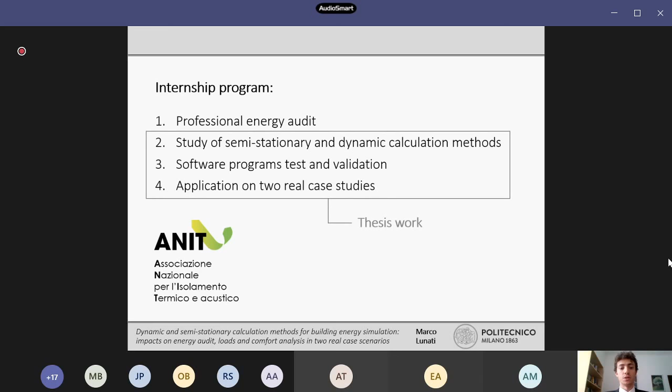This work was part of an internship program at ANIT. After following experts in an energy audit on a residential building, the focus moved to the study of semi-stationary and dynamic calculation methods, and I had the chance to test the ANIT software programs on two case studies. The first, a re-elaboration of the previous energy audit, gave me the chance to test and validate the model results against the benchmark of real building consumptions. The second was more a work of analysis of the dynamic potentialities on another existing building with tertiary use.

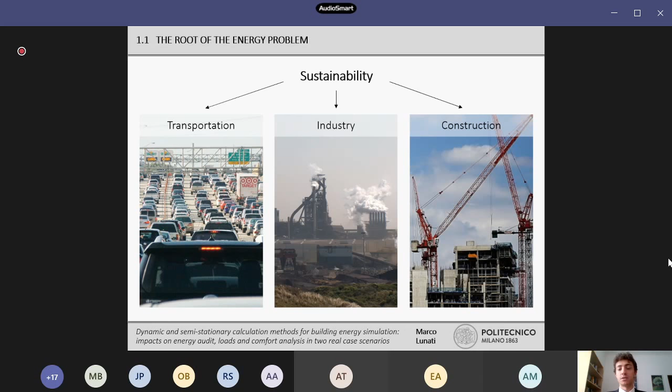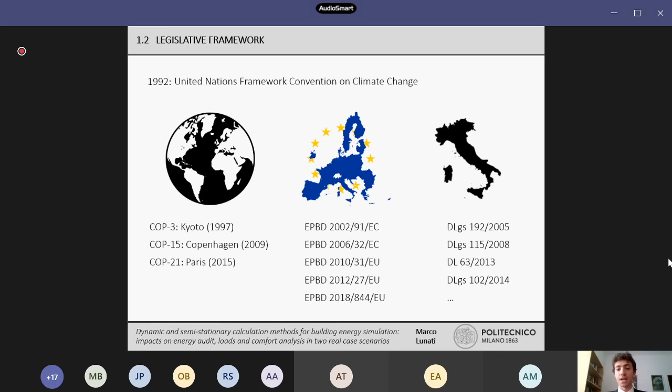As the climate change problem has been increasingly capturing our attention, interest in the energy field started to be accompanied by another concept: sustainability, especially in the construction industry, which absorbs up to 40% of the final global energy in Europe. The countries which signed the Framework Convention on Climate Change meet every year at the Conference of Parties. In particular, the Kyoto Protocol of COP3 inspired the European Union to produce the so-called Energy Performance of Buildings Directive, in order to improve the energy performance of the building sector in the community, implemented also at national level.

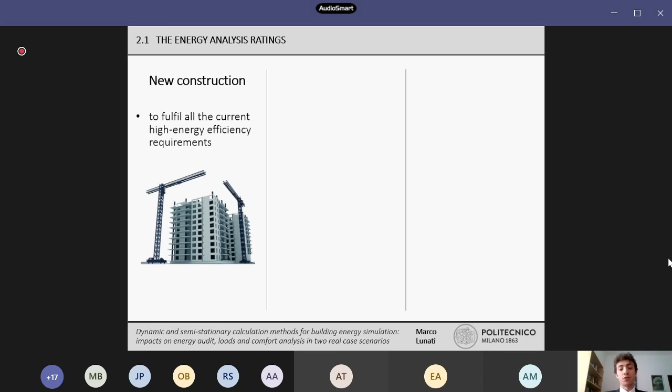The type of energy analysis is linked to the purpose to be carried out. A new building design is used to model and foresee the behavior of the building before construction. The energy performance certificate aims to rate the energy performance of existing buildings based on reference parameters, while the energy audit seeks to assess the actual energy behavior of existing buildings in order to improve their performance.

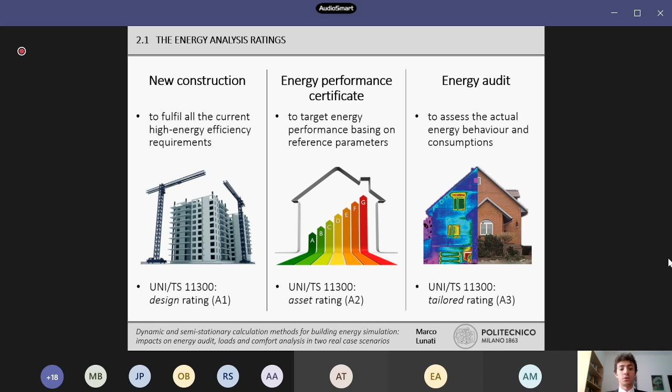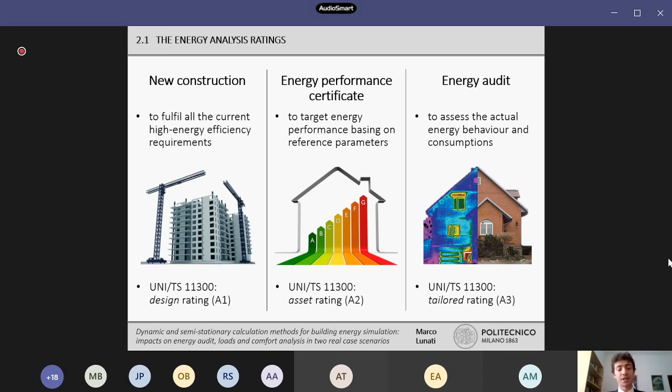These categories are reflected in the rating classification by the UNI/TS 11300, which identifies three types of ratings. Design and asset ratings are based on conventional climate and use, the former on planned buildings, the latter on existing ones, while the tailored rating is instead based on climate and use adapted to the actual building.

One of the main technical evolutions going side by side with the EPBD series has been the improved level of detail in building energy modeling. Starting from a seasonal evaluation, standards moved to a monthly semi-stationary method and then introduced the hourly dynamic one.

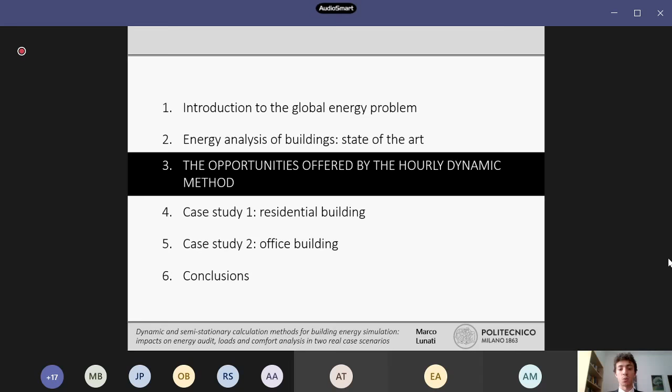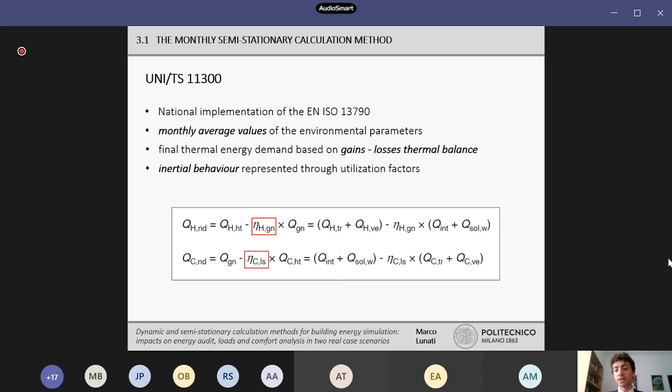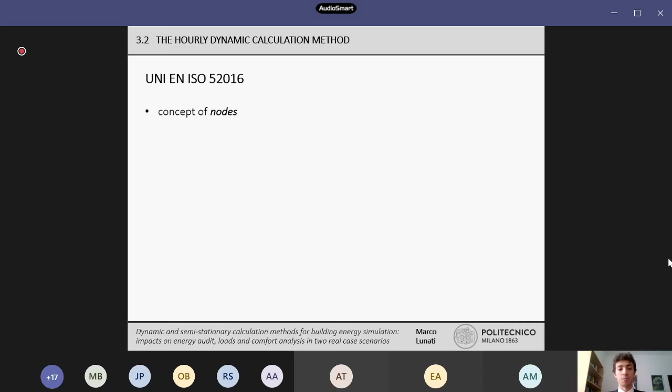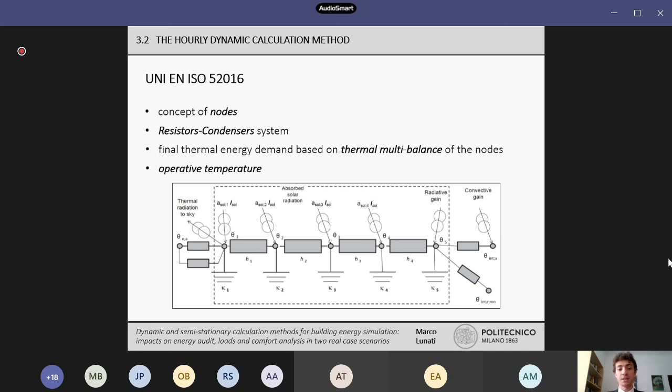They are specific points characterized by thermal inertia and temperature varying in time. At each node, an hourly energy balance is made according to the resistor-condenser system, and the heating and cooling needs are calculated based on the operative temperature that comes from an overall energy balance of the thermal zone.

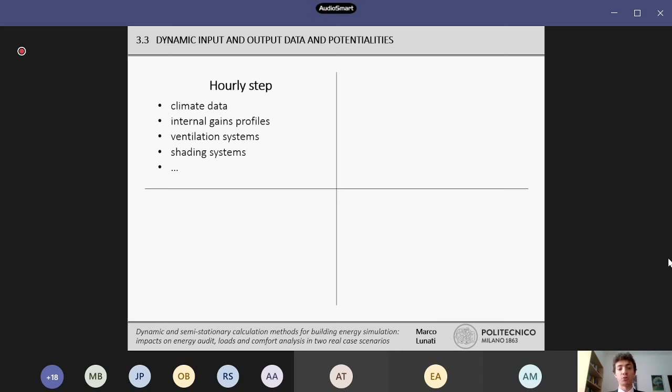The hourly step of the dynamic method is ideal to reproduce both climate data and the description of building users and systems. We can manage the plants in three ways: free running, not considering activation; constant or variable power; and with plant intermittence.

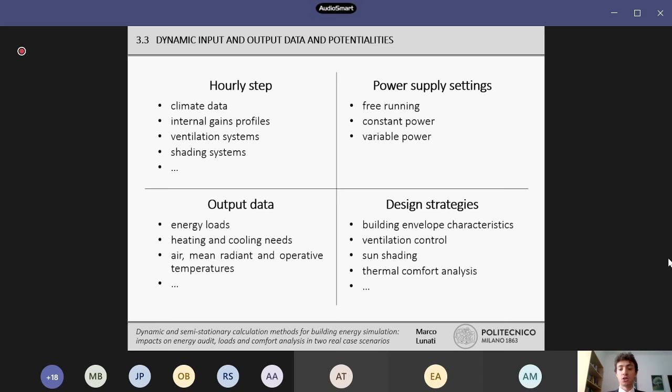It is crucial to develop a strong ability in reading and communicating the outputs, from energy loads and needs to the hourly trends of temperature, and also to take advantage of them at the design stage, especially looking at possible strategies to be adopted on the building.

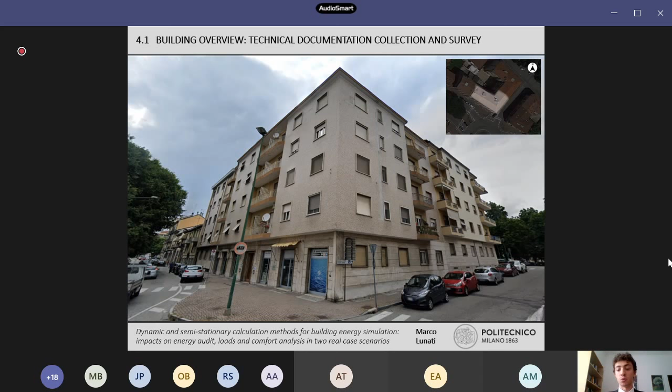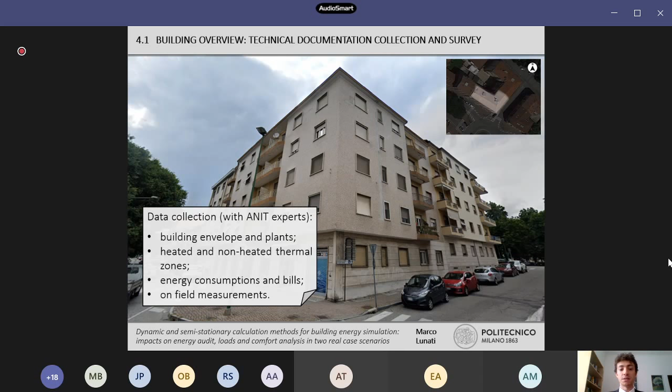The theoretical part was followed by two case studies. The first consists of an energy audit on an existing building in Casale Monferrato, Piemonte, to evaluate its winter energy performance. The data collection operation, made alongside ANIT experts, regarded the building envelope and plant characteristics, heated and non-heated thermal zone identification, the energy consumption and bills from the building manager, and on-field measurements.

A 3D model was made in Revit in order to return the quantitative amounts of opaque and transparent structures, and also the characteristics of the surroundings. Thermal zones are assigned one to each floor.

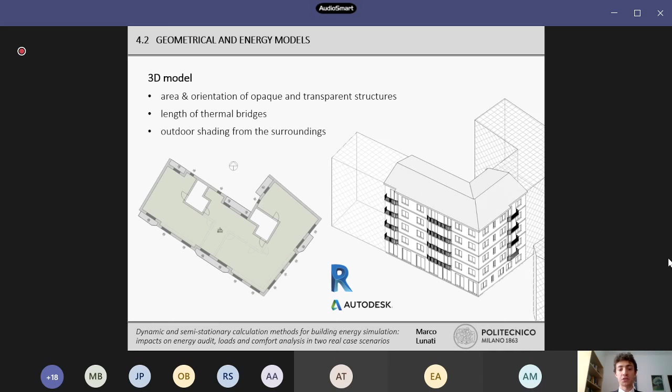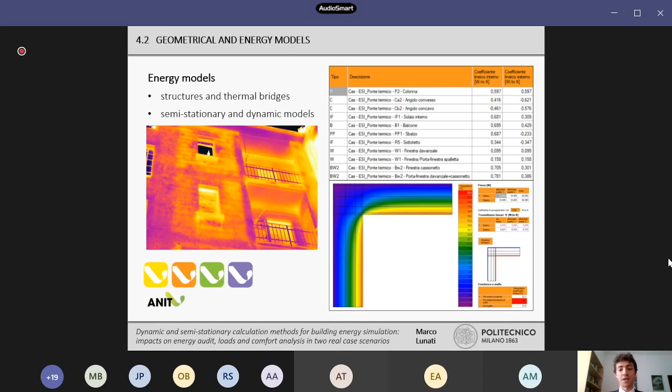The energy models were made in the ANIT software programs, in particular Leto for the semi-stationary analysis and Icaro for the dynamic one. The thermal properties of opaque structures were obtained through on-field measurements, and thermal bridges were calculated analytically. The model validation compares the energy consumption of the models with the real consumptions through the evaluation of the heating performance index parameter.

It is given by the ratio between consumptions and the degree days. Models are validated if the margin of error is within 5% with the real consumptions.

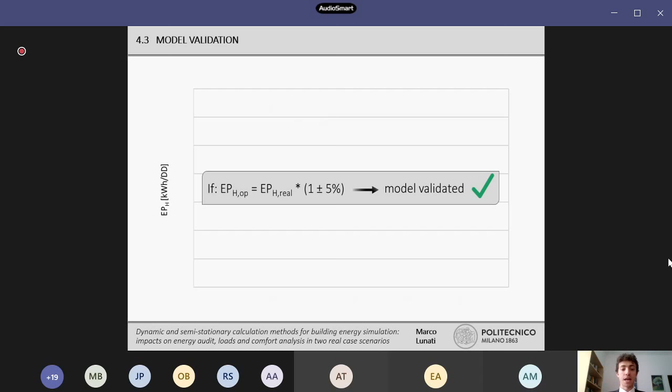As for the evaluation of the EPH real, I opted, instead of the conventional value of 20, for a range of temperatures between 20 and 18 degrees. This to take into account the fact that temperature can lower below the 20 degrees value due to the fact that plants do not work constantly, for example the night shutdown of the systems.

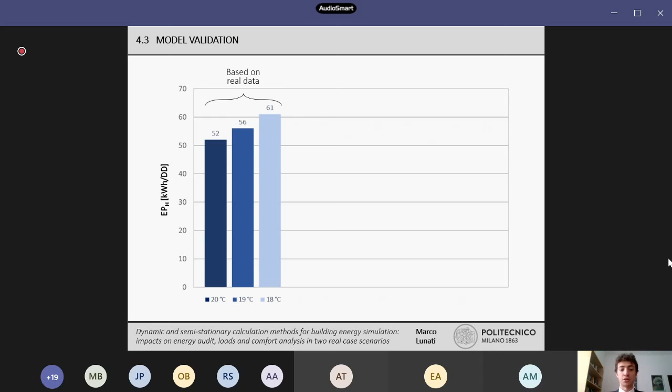So this range strongly influences the results, as we can see. Basing on the same energy consumptions, the lower the temperature assumed internal, the higher will be the EPH value.

What about the models? The semi-stationary one and its dynamic counterpart running at 20 degrees, D1, fit in this range. The following models tend to stay in this gap with a couple of exceptions.

The introduction of intermittence in D2 decreases the energy consumptions, and so in the following model, D3, it makes it reasonable to increase the set point temperature to 21 when the heating system is on.

The introduction of new and higher internal gains in D5 decreases again the energy consumptions, and this is then settled in the last two models working on the ventilation parameter.

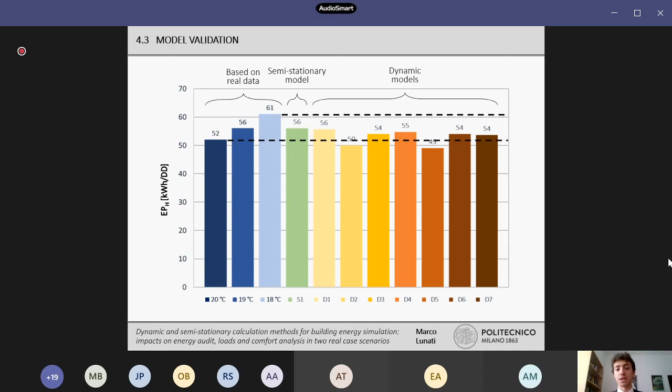So outputs are encouraging, as the EPH values tend to stay in the real range or out of it within an acceptable limit, and this supports also the initial conservative choice of a range instead of a single value for the internal set point temperature assumed.

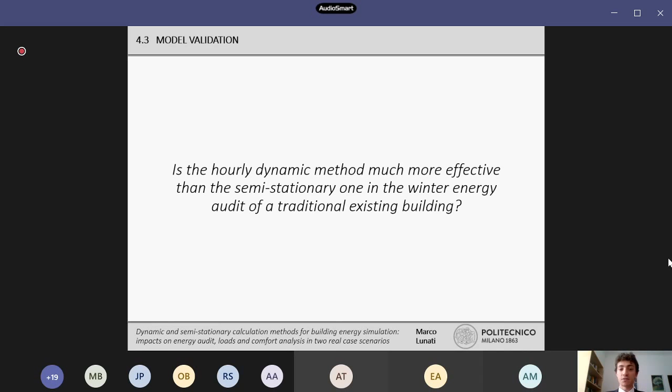So, is the hourly dynamic method more effective than the semi-stationary one in the winter energy audit of a traditional existing building? Well, no. In this case, the semi-stationary model shows an optimal reliability, and even if it is less detailed, that's enough to describe the energy behavior of the building in the winter season, at least.

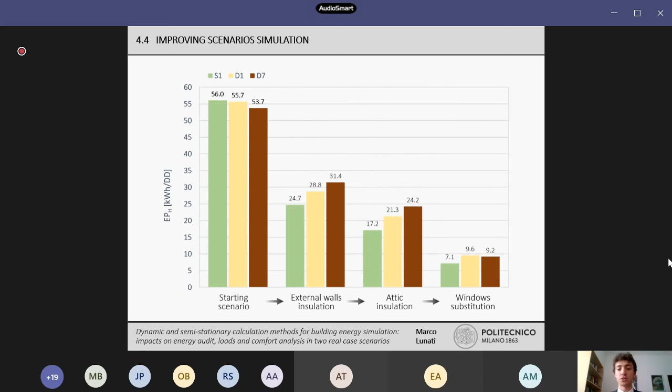The second part concerns the improving scenarios interventions, from the envelope insulation to the window substitution. Comparing S1, D1, and D7, we can see that the semi-stationary model decreases its consumption much faster than the dynamic ones. And with respect to D7, even D1 tends to decrease its consumption quite faster, at least in the first two scenarios. But any consideration has to be based on further analysis.

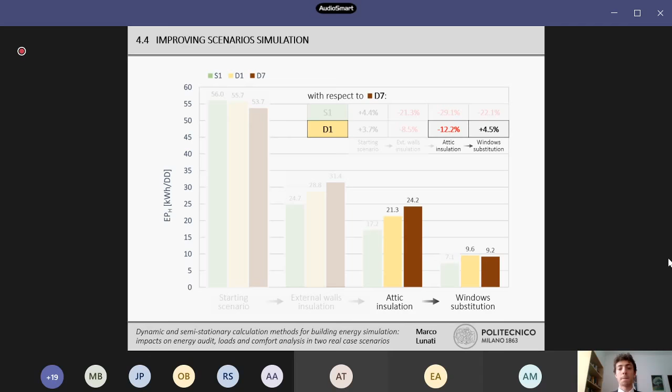So for example, we want to understand why D1 and D7 EPH values tend to get close in the last scenario, the window substitution. So checking the individual loads, we can see that the window substitution equally reduces solar gains and transmission losses, because new windows are the same in all the models.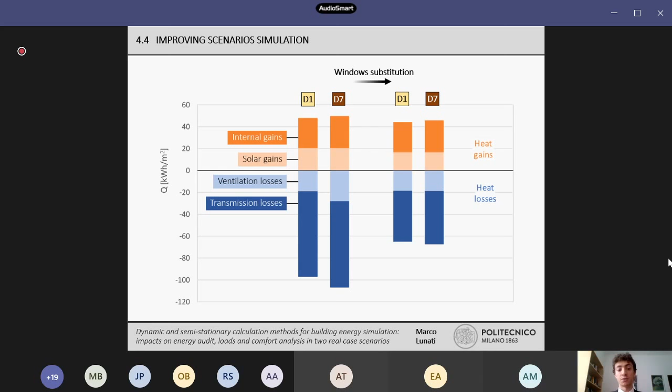So is there now any remarkable difference in the improving scenarios among the two methods? Yes, the semi-stationary model tends to lose some reliability, underestimating the heating needs, as the initially significant heat losses by transmission are reduced by the upgrading of the envelope performances.

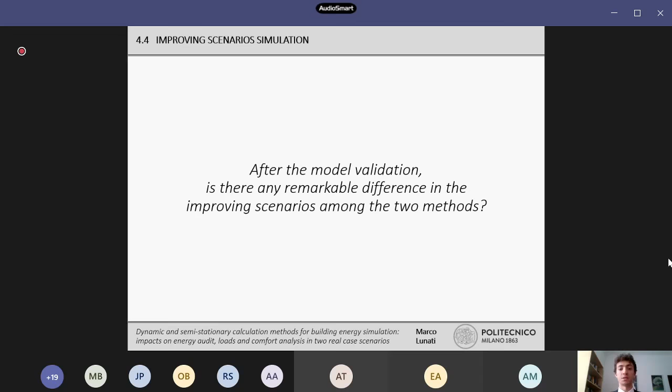The second case study took an existing office building in Milano as the base for a theoretical work of comparison among the methods.

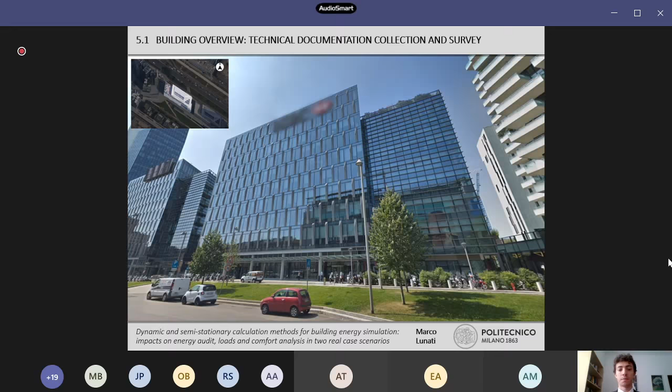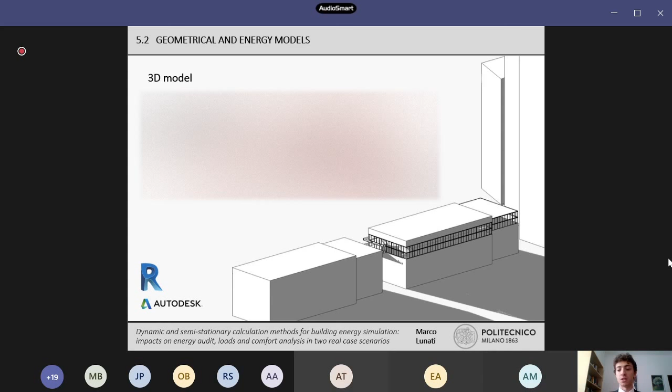A 3D model is again made in Revit, and in this case, each of the two floors analyzed, the 6th and 7th, was just divided into two thermal zones, according to the orientation.

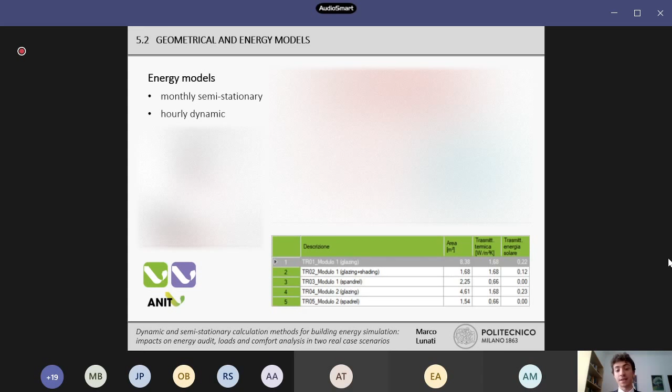The energy models were made again in the ANIT software programs, but in this case, the characteristics of the components were made available by the construction company of the building.

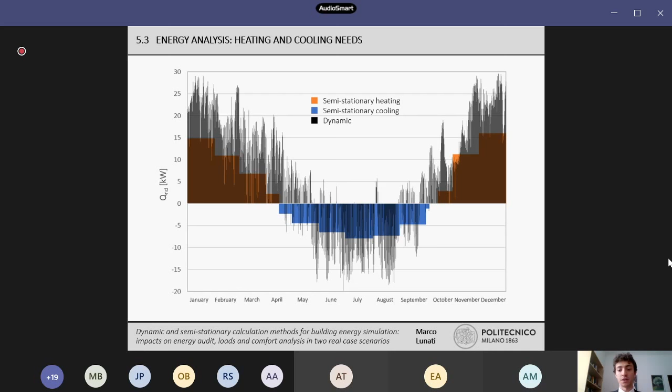So comparing the semi-stationary monthly average power demand to the dynamic hourly trend, here is what we get along the year. And focusing then on a limited period of time, we can now appreciate the differences, for example the cooling needs along a few days in between June and July.

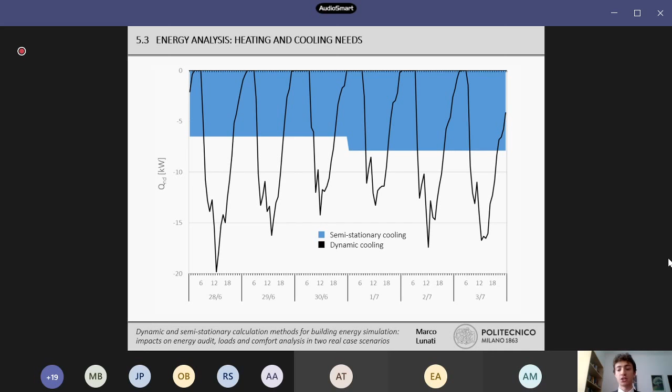But we can go deeper in the analysis of the dynamic potentialities, for example looking at the correlation between energy loads and needs.

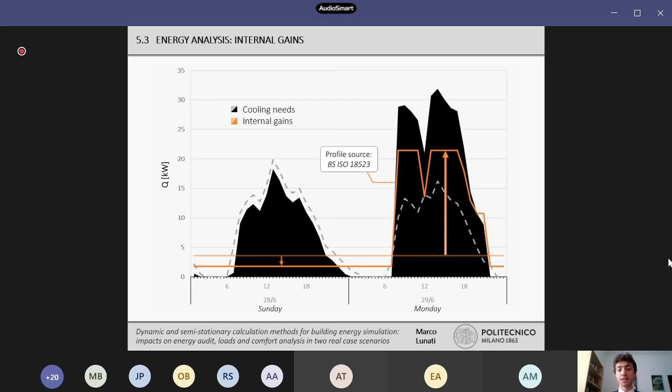So starting from internal gains, and with the model with constant internal gains, we can see what happens as we assign a new detailed and higher profile during the weekdays. So their weight is fundamental, especially in buildings with high occupancy density and appliances load.

We were also able to understand the differences in terms of solar gain between differently exposed thermal zones, and so their impact on the daily peaks and also, of course, on cooling needs.

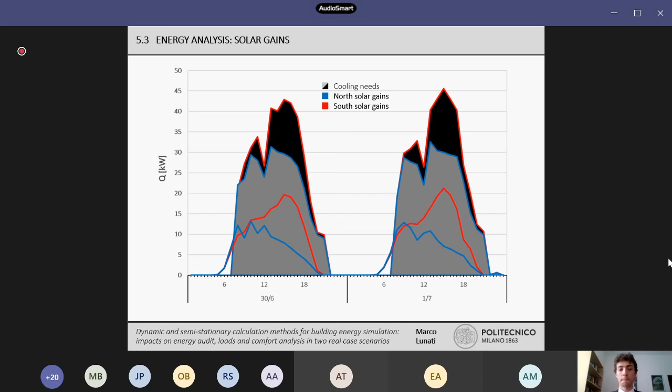But also ventilation and temperature. As the external temperature goes beyond the cooling set point limit, here 26, the ventilation contributes to the increase of cooling needs. We can simulate, for example, what happens increasing the external temperature because of climate change or of the distance between the building site and the place where climate data are collected.

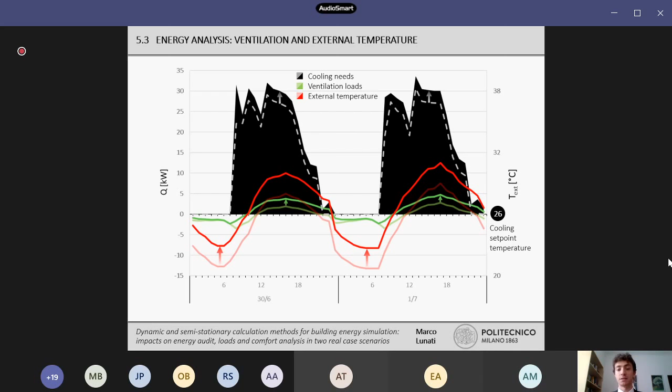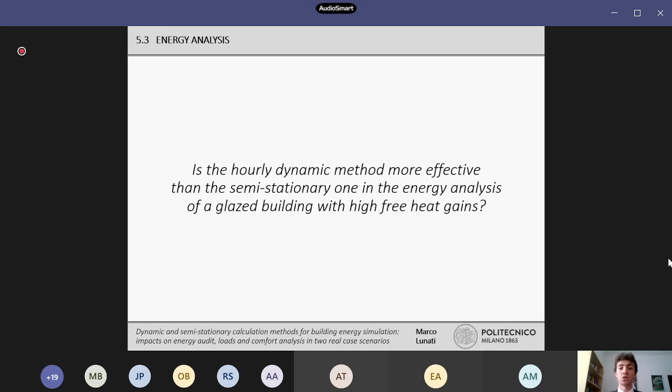So is the hourly dynamic method more effective than the semi-stationary one in the energy analysis of a glazed building with high free heat gains? Definitely yes. It is way more powerful, not only because for this case study typology it provides more detailed results, but also because it allows us to understand them, helping to identify where to focus attention.

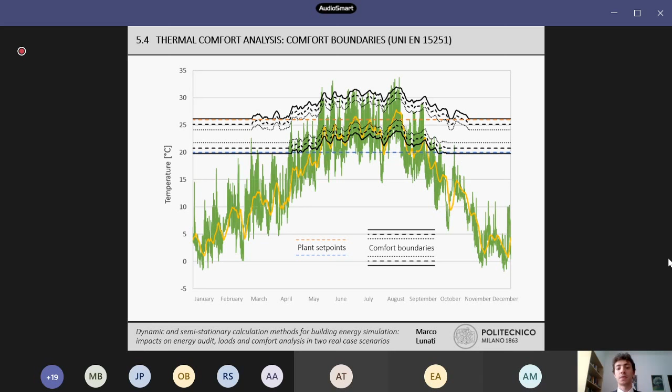To further stress this dynamic effectiveness for this case study typology, a thermal comfort analysis is presented, evaluating the operative temperature in free running conditions. We know that users are able to adapt their comfort range, but within certain limits, according to their different degree of acceptability, represented by the different comfort boundaries. This has a positive effect on the number of comfort hours along the year, especially in summer.

So starting from an hourly based representation of the dynamic result, we make some preliminary assumptions of the design strategies to be adopted. This is another way to take advantage of the dynamic method.

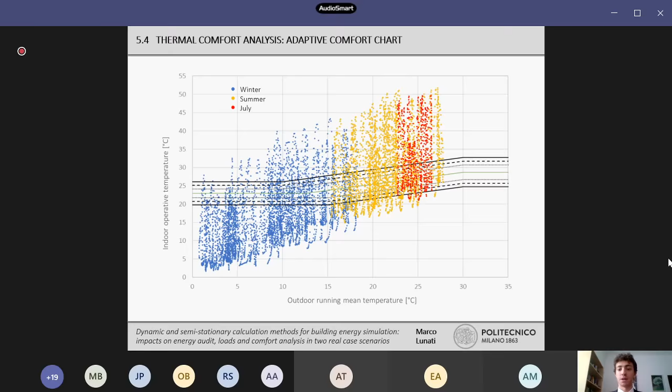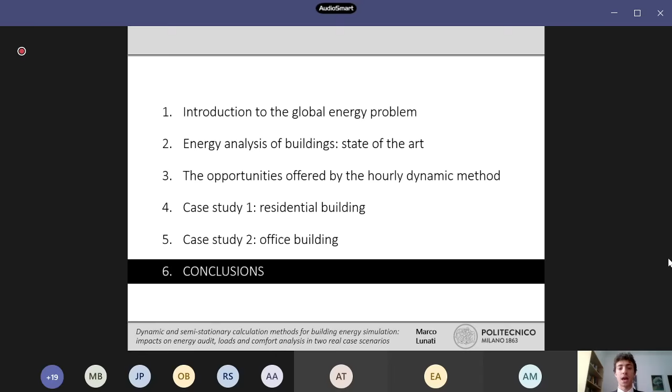So this case study was useful to run an in-depth analysis on the building energy modeling characteristics concerning the calculation methods, in particular the hourly dynamic one. Referring to the Italian classification, regulation, and standards, we can say that the main result of this research was outlining the most suitable fields of application for the method.

In particular, its use is recommended for requisiti minimi and criteri ambientali minimi in case of new construction and important renovations, which require verifications such as the cooling performance index.

It is necessary for new construction as the building doesn't exist yet, so the field of energy modeling is almost unlimited. It is not necessary for energy performance certificate, since it is a user-independent tool with no designing purpose, but a comparing one. Thus the importance of the calculation method hasn't actually got a leading role in this case.

And then it is both recommended and useful for energy audit. There is a great chance to test the dynamic approach. Indeed, a calculation method whose results are proven to be comparable with the real ones is a strong indicator of the applicability of our tools also to new construction projects.

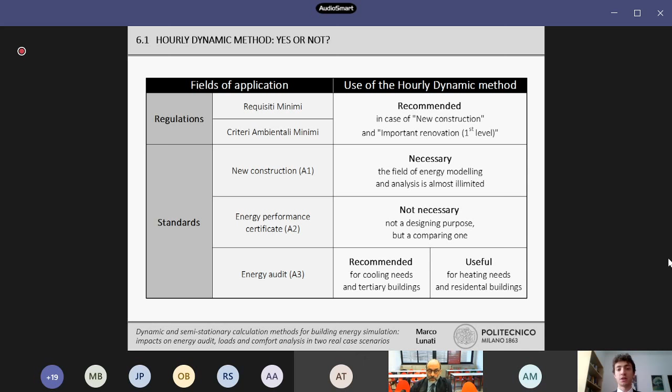Of course, we still don't have any result yet. Thank you for the attention.